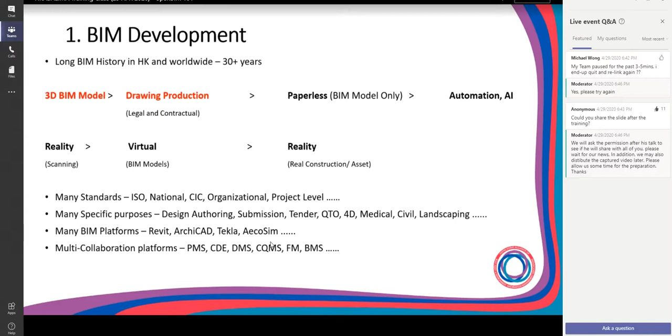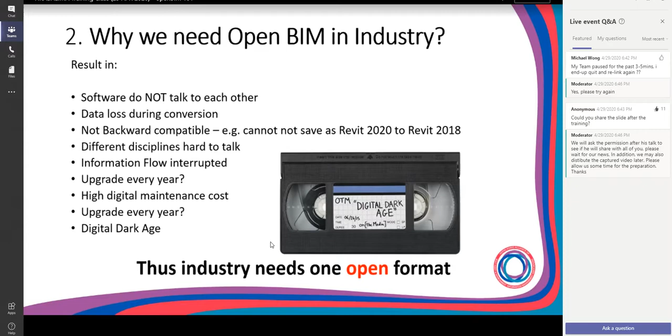So these are the points that I shared. Digital dark age. So it comes to the conclusion that the industry needs an open format. Now, when we talk about the open format, we will definitely come to an organization called buildingSMART. buildingSMART is an alliance of construction and facility management organizations. They try to standardize the process, workflow, and procedures for BIM.

Okay, now we all know BIM. But there are a lot of different forms, a lot of different information flows in the BIM process. So buildingSMART says we must have a standard to standardize all these workflows so that everybody is talking in the same language, right?

So buildingSMART facilitates key leaders with the use of these standards, enabling civil structure and building asset data in the life cycle process to integrate into the open BIM standard, improving the value, so that we can have a common language to share. Their vision is to have a sustainable building industry, in simple terms. Of course, on their web page they have a lot more of their vision to share with you, but since this is 101, I just picked some key points.

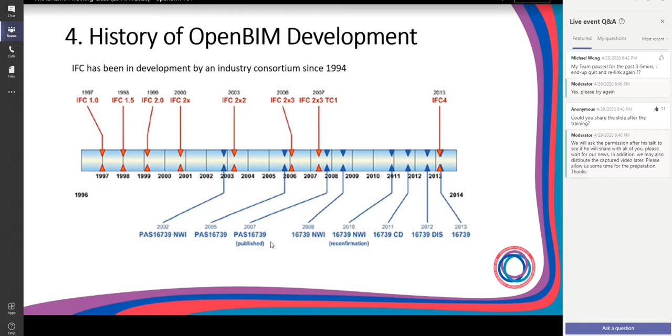So this is where we are on the openBIM development.

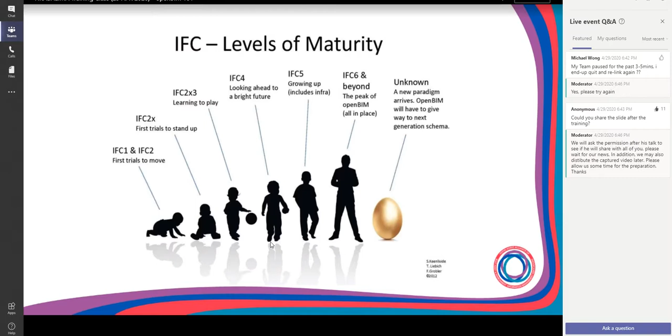So when we're talking about openBIM, we are not talking about a particular platform or software. It is a global effort where they try to share a common base, common knowledge.

Being a little bit academic, what is openBIM? Basically, it is a universal approach to collaborative design. The keyword here is collaboration—collaborative design, realization, and operation of buildings based on open standards and workflows.

So basically, it allows different project team members to participate in the BIM regardless of the software tools they use. Now, this is very interesting.

Now, I myself, by training, am an architect. I'm more concentrated on the design aspect. I may not be very familiar with what the FM people are using during the operation phase, but we are all stakeholders in the whole project life cycle. It is unfair to say that I have to learn every single piece of software, or that I can be expert in every single aspect. Nobody can do it.

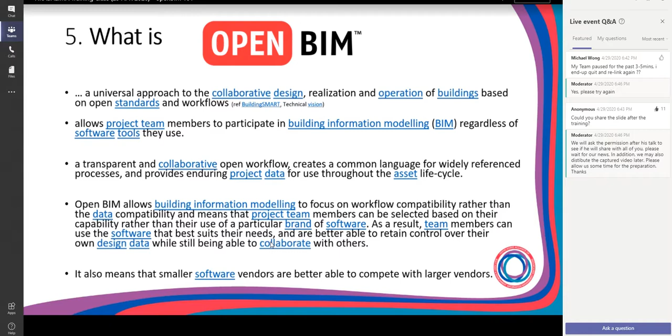However, the approach of openBIM is to open up—they're all open source—so that whatever you want to do, if you have the capability of programming or understanding how the software is put together, you may be able to change it and adapt it to serve you.

So on the keywords: the benefit of openBIM is a transparent, open workflow that allows all members to participate regardless of the software tools they use. You may be very good in Revit, Navisworks, or ArchiCAD—keep on using the software tools you're using. It doesn't require you to learn another new piece of tools for your task.

Secondly, common language—no matter which tools you use, as long as we have a common language, then we can talk to each other.

Number three, project data. Regardless of the tools that we're using, the most treasurable asset is the project data that we created during the whole life cycle. So in the design phase, we create the design data, and then it's passed on to the construction phase, which creates the construction data.

And later on it passes to the operation, and you have all this data for operation use. With all this operation experience, it forms the information requirement for the client to apply to the next project. So it's the project data that's the most treasurable. Now if you compare this project data with the digital dark age I just mentioned, it's the flow of this project data, non-brand, non-proprietary system, that regardless of the time, regardless of the media, we will still be able to get and extract all this project data for the project use.

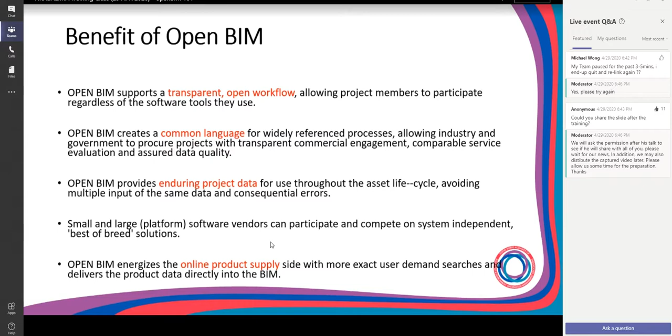Now we understand all these benefits, but what are the challenges? I put a few bullet points here. Well, since this is only the first time of the whole openBIM series, what that means is we are not very familiar with the concept of openBIM.

We may be very good at a certain particular software platform, we do not know other platforms. The government specifies a few platforms there, but it is not the whole of the BIM. So the local support here is still lacking. Hopefully after the whole series of BIM here, then we have a better understanding of how we position ourselves in using the BIM technology.

The next point here, which is very interesting, we have misaligned interpretation towards BIM. So towards the same object, for example a wall, the way architects see a wall, what a wall is, can be totally different from how an engineer sees a wall. Same object, different interpretations, of how the BIM model should go. So the architect may build their column from bottom to top, whereas the engineer may build it from a level by level point of view.

Same for the slab. Now this different interpretation of the BIM model will lead to different quality or different purpose of a BIM model. So without an understanding of all this, the model sometimes may not be able to be beneficial for all the stakeholders.

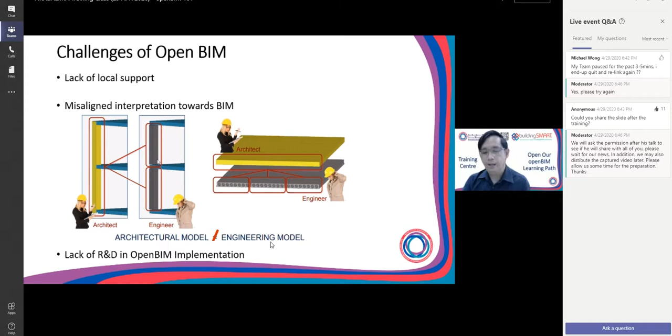Point number three here, when we talk about openBIM, it is not depending on a particular brand, so which software we are working on. That means there will be a chance for us to actually grab the open source file, then we have to write our own program. Maybe in that case we are talking about the convergence of the building professional and the IT professional coming together.

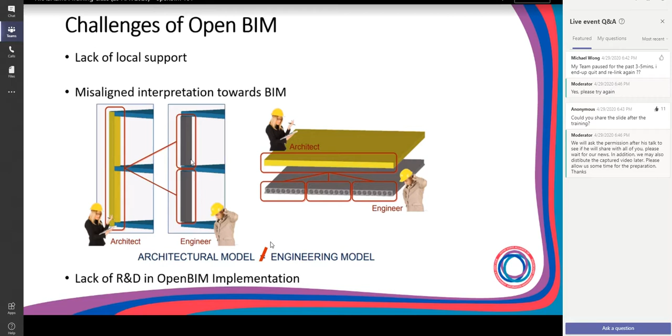So how can the IT professional know about the need of our building professionals? In that case, there will be an R&D requirement. However, this demand has not been fully experienced in the Hong Kong market at the moment. How many R&D, how many funding, how many companies are doing this R&D program writing for the building industry? Not much.

All right, now when we're going into a deeper understanding of the openBIM concept, just before that, let me clarify some of the misconceptions. Now I just mentioned about the different formats that we'll get in touch with in terms of software. Somebody knows about Revit, somebody knows about ArchiCAD, but openBIM is not about conversion.

It is a false expectation to think, okay, can I convert a Revit file into an ArchiCAD format so I can open it in ArchiCAD, or can I convert a Tekla file into an ArchiCAD file so I can use it there? The concept of conversion is not the real understanding of what openBIM is. When we talk about the common sense here, we are not talking about how to convert a file from one format to another. Please be clear, we are not talking about conversion here.

Now for the rest of the presentation, this is the formula. openBIM consists of three things. One is a model, a 3D BIM model, in IFC format. That's not enough, we have the BIM model, but that's not enough. We must also have a common language.

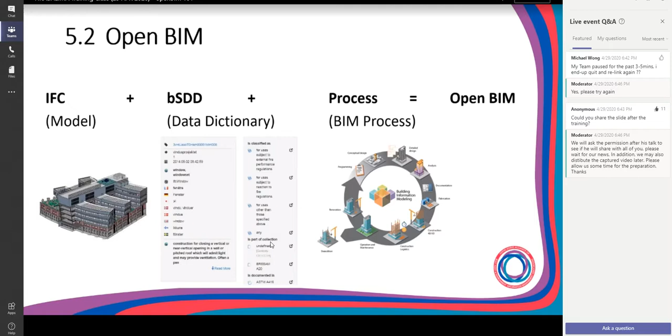Just remember this formula here. For the rest of the slides, everything refers to this formula - whether it's the BIM model, the data dictionary, or the process. And then we'll come up with more jargon.

Now, if we want to put the three things together - when we talk about IFC, the blue circle, there's ISO standard 16739, talking about how digital data should be structured for whatever requirement. Some of us may know about ISO standard 19650, which is getting more popular now. But when we talk about BIM, it's not just one standard, 19650 - there are more standards, and more are coming.

On the process, the yellow circle here, we are talking about the BIM process - how the information is delivered. There's another ISO standard, 29481, covering the methodology and format for how it should be delivered. And in terms of the technology side, the data dictionary, there's the framework for object-oriented information, ISO 12006.

Again, all these ISO standards are not familiar to us. However, when we talk about openBIM, we must be talking about a common language, and it's all these standards that take prevalence. Out of that, there's a red circle, a jargon called MVD, model view definition - taking information and extracting it to serve a certain purpose. I'll come to that MVD later on.

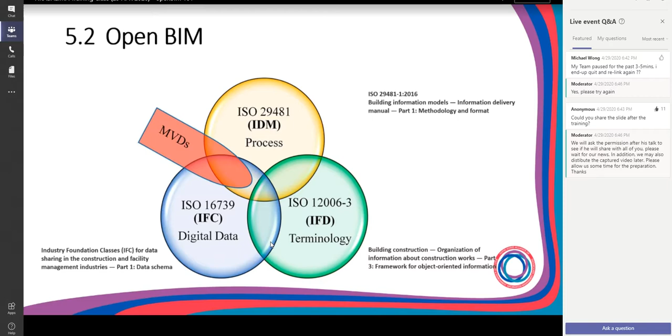You can see the relationship of all these three things joining together, and we have new definitions. The easiest one to understand is the third one, the BIM process, because we've been practicing that for the last 15 years in Hong Kong. So everybody understands the BIM process.

So we have the requirement from the client - they need to have a database throughout the whole project life cycle. Then the design consultants respond to the client's need to use BIM for design, and they need to get objects from the project library. Then they use design authoring tools to come up with the column, beam, window, things like that. We have the structural column, beam, and we have the MEP - the ducts and pipes. We know all this.

All right, we know all this. And we also know input information: the dimension, the material, the U value, the loading, and the flow rate. Okay, these kinds of information we need to input in the BIM. When you say BIM, this is the I side, the information side.

All right, now we mentioned the drawing production. From the BIM, we have the drawing production, whether it's the legal GBP submission, the structure submission, the tender drawings, or the shop drawings. These are drawing production. Again, we know about this. And then we also know about the coordinated disciplines. We have clash detection, reporting, the QTO, the cost and the environment. Again, we know this. We are practicing this already.

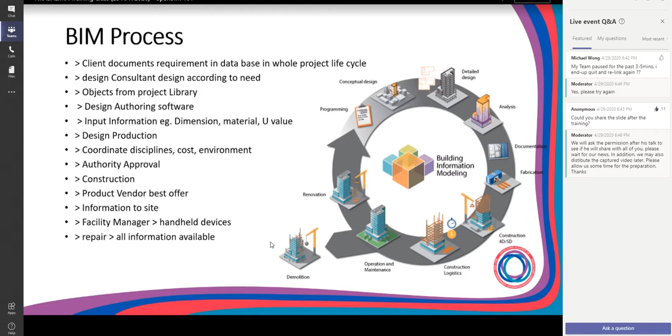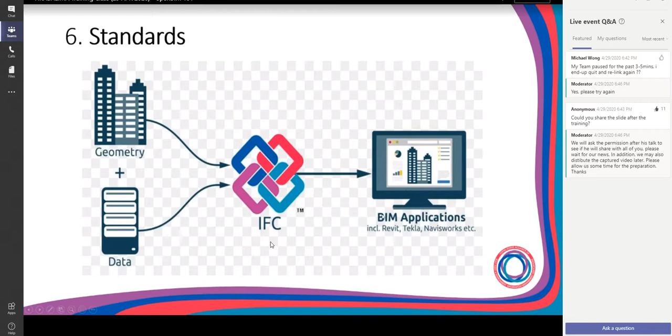Now, if you remember the formula, the first one, IFC. Now we talk about standards. IFC is all about standards. We have the geometry part, we have the data part. When they talk in the IFC format, they standardize them so that we can further develop the BIM applications, be it Revit, Tekla, Navisworks. We are familiar with all these BIM applications. However, we are not familiar with the front part, the IFC part.

When we say IFC, I'll just mention those names, those jargons. IFC 1.0, 1.5, 2x3, 4, and 5. These are the historical development. So all this building information is shared in one open format, with the different versions, 2x3, 4, and 5.

If you look at the applications, IFC is now being specialized into IFC4 precast, IFC for site, for landscaping, for urban planning, IFC for airport, IFC for road, IFC for bridge. These are developments from the IFC standard. It's not only a common standard, but also beginning to specialize in certain areas. All this jargon you will start to touch on when you really look into the IFC standard.

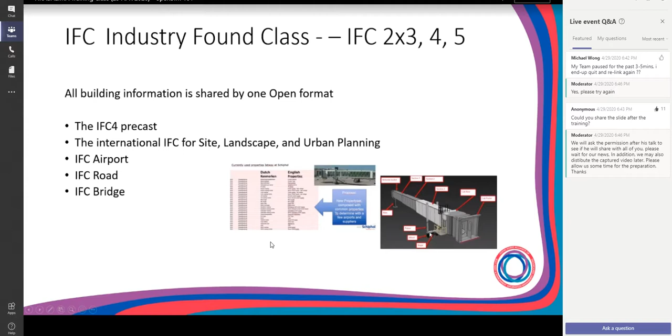More jargons, right? When we talk about openBIM, it is a digital way to enable different stakeholders to work together, regardless of the platform they're using. You can see the two gentlemen here. The one on the left-hand side is using BIM application I; he may be an architect or engineer. The gentleman on the right-hand side is using another BIM application, J; he can be a property owner or a contractor. We assume that I and J are two different platforms.

Think about the real situation we are having at the moment. It is a fact that a certain brand of software is dominating the whole market. When the design phase, the construction phase, and the FM phase are all using the same platform, the same BIM application, there aren't compatibility issues, apart from backward compatibility. So the data generated from the design phase can be used in construction and for operation.

Imagine all of a sudden you have an architect using a certain brand and the contractor using another brand. How can they communicate? How can they talk to each other? Do you need to regenerate everything again? So try to look at it from this perspective. It came up with five basics for sharing our thoughts. More jargons, right?

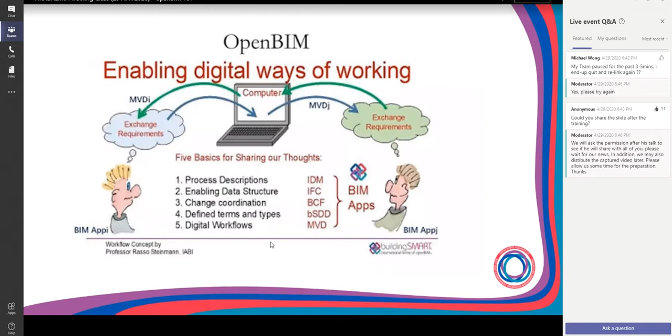Now, I'll try to have an overview for each one of these. I know it's a lot of jargon. It's kind of boring, right? But we have to understand all these basics first.

Okay, IDM, Information Delivery Manual. The definition of IDM is a methodology to capture and specify the process and information flow. We are talking about the process. What process? We talk about the client, the design, the construction process, and the information flow through the whole thing. So for this information delivery manual, we can draw an analogy; look at the example below.

The analogy is that IFC, Industry Foundation Classes, is like establishing a language, English or Chinese or French or German. It's a whole system of language. So that's IFC. But when we want to do a building for a certain purpose, like a statutory submission, you are not concerned with the construction language. For statutory submission, I'm concerned more about submission.

I'm concerned more about areas, more about the functional use. How to construct it may not be my immediate concern. So from the whole language, IFC, you select a particular word or syntax that is relevant for a certain purpose, and that is the MVD, the model view definition. You do not need to know every word in the whole language. You only need to know these few words for statutory submission, for example.

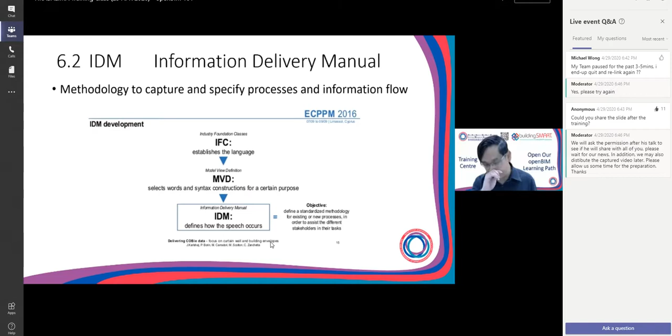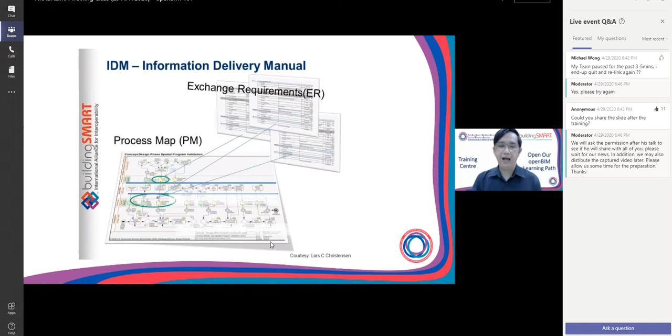So the objective of IDM is to define a standardized methodology for existing or new processes, in order to assist all the different stakeholders in the task: what to deliver. Now, this slide makes it a little bit easier. At the end of the day, how are we going to use this information? How do you need to exchange this information?

Now, we know these terms, exchange requirements, exchange information requirements. In terms of a lot of tables: what format you're going to give me, how can I read and use all these comments, what sort of information you will be giving to me. So exchange of information. So that is the IDM, information delivery manual.

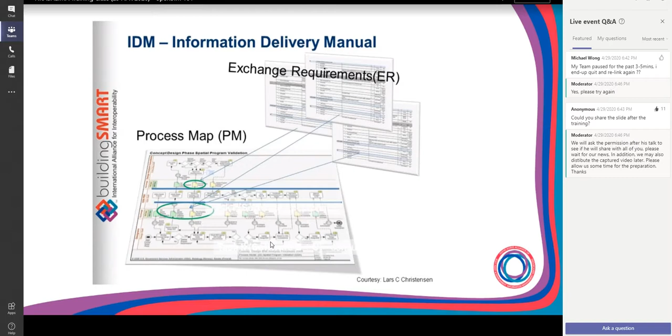Next jargon, BCF. BCF stands for BIM Collaboration Format. We all know that we need to go through designs. In design, there will be different ideas, trials, test cases. We talk about collaboration: you need to talk to the structural engineer, the building services engineer. In the construction phase, we need to talk to a lot of other people: the power company, the subcontractor, the manufacturer.

A lot of these collaboration activities are happening. So how can we gather all this information to express ourselves and talk to others? What tools are we using? Red pens on the plan. We mark up, write down our comments, scan the sheets, and pass them to another party. That party may print it out, look at the red markup, and change the design to cater to all these requirements.

Now, we are using red pens, paper, and clouds. This is what we are using at the moment. Now, openBIM thinks this is not efficient. Who has made this comment?

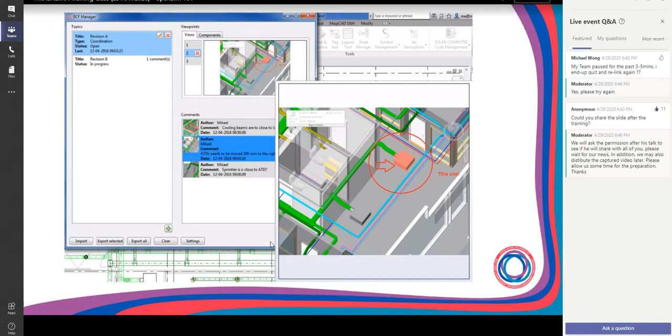So there will be 100 or 1,000 similar cases everywhere in the project. Exactly this comment here, where was it made? Okay, so by means of this BCF format, it is not associated with a particular software or platform. So every software can actually read it and you jump back to this location. Now that is the openBIM concept for collaboration, the BCF format.

Okay, so it can centralize all this coordination and communication, it tracks the issues, who has made a certain comment on a certain date, who is going to respond to it. So we have the 3D viewer to see it in its original context. And it can access the information anywhere, anytime using a browser or different format. It can manage the access rights, who can see a certain format, who cannot.

All right, and also, apart from the cloud or the comment that we made, sometimes you will want to attach a video, an image, a JPEG, or a crop, a snapshot of your approved drawing. Okay, so it has the ability to attach your file to support the discussion.

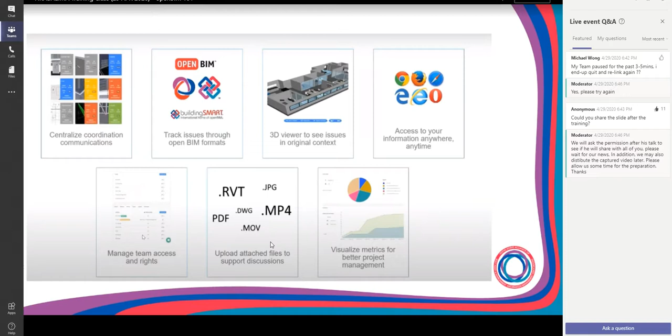And lastly, they may have dashboards to outline the performance, the KPI of certain parties, how many comments someone has made, what is the response time towards those comments, and how many comments have been entertained out of the totality of the comments. Now, all this can be performed as a result of using a BCF format.

Now, coming to the difficult part, the model view definition, right? MVD. Because we want to have a specific use, GBP, for example. I just mentioned GBP, the General Building Plan submission. So the task is very, very definite. So the GBP submission needs what? We need to have the functional use. We need to have the area. Functional use and area, for example.

Out of all of this information in the BIM model, how can we find the functional use and also the area, picking from the whole database, and then we can further develop on this functional use and area, so that we can devise an automated system to help us do an automated GBP submission, for example. I'll show you a case later on.

Okay, COBie here, for example, we would like to have the product information, the location information, to serve the operation phase. We do not need every single piece of information that the BIM model contains. So it's a very, very particular data requirement. So we have this term called the MVD, model view definition, coming out from the whole IFC structure.

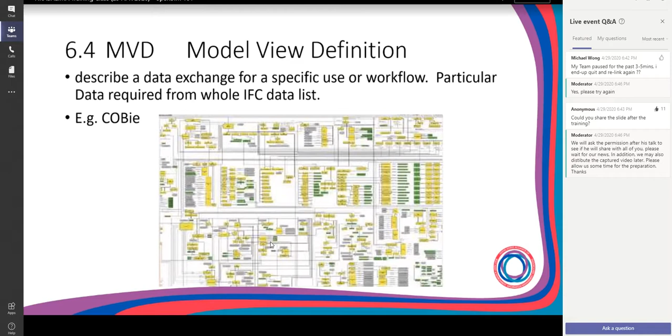Now it comes to another session here on the standard libraries. We have all the standards. Of course, we have a lot of objects, all right? A door, as you mentioned, will be used in project 1, project 2, project 3. Every single project will have doors. But a door can be supplied by manufacturer A, manufacturer B, manufacturer C. They have the product information.

So in terms of resources, if we can have a resource library which contains a standardized object and product database, if everybody in the industry follows the same standard, that means regardless of whether you are manufacturer A or B or C, all the naming in the database is the same. All the properties are the same. I use the door width as an example, right? So every manufacturer calls it door width, not width of door.

So they are having the same language, right? So that all these entities, the properties, classifications, they're all the same. They can all share the same library of objects and attributes. So now all the software understands the terminology. Now this is the bSDD part, okay, the data dictionary part.

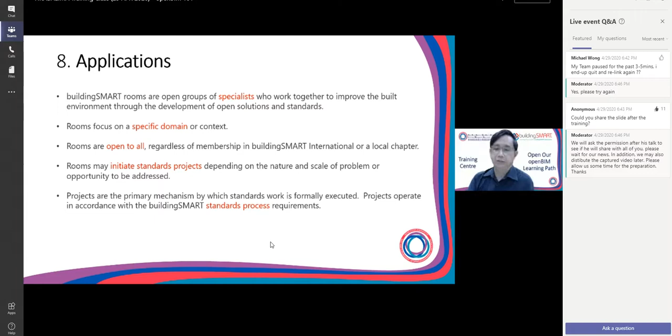But there's a room about railway. Railway is the youngest one, and there are some unborn rooms. Last year they were talking about a power station room. It hasn't officially been born yet, but this is the direction. So with different objectives, they can initiate standard projects so that they can understand the nature and the scale of the problems they try to address. And lastly is the standard process requirement. With all these applications, all this jargon, all these definitions, how can the process be standardized so that we can work in a very efficient way?

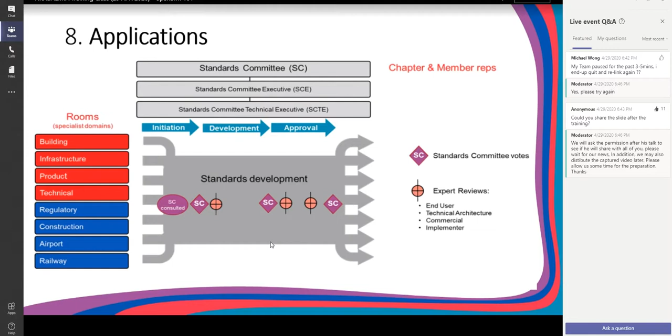Now, when I say buildingSMART, I'm referring to buildingSMART International. It is an organization composed of many local chapters from all over the world. I'm sure Ada will be very pleased to tell you that we got the Hong Kong chapter last year, right? We were accepted by buildingSMART International and established our Hong Kong chapter. That's why we are sitting here having this series of openBIM seminars. We are the Hong Kong chapter. All right. I just mentioned these 8 rooms at the moment, but there are 9th and 10th rooms that keep on coming.

Okay, now I just pick up a few examples to let you get some feel about these different rooms, what they are doing. Now you see that this technical room is really technical. They're talking about programming, how to write a certain program. How to call the IFC building element component and element type. You must fulfill a certain syntax before the program can work.

Okay, I do not understand all these, right? So this is really technical. I actually sat in that room for the whole session. I couldn't understand a thing, unfortunately. But that's needed because we are talking about open standard. Standards are just a framework. How can we make use of the framework to help ourselves? I'll show you in several examples later on.

Now, this product room, for example, is talking about products, right? So we know about 5D BIM. We're talking about the quantity take-off; the QTO is to facilitate the QS. But what about the manufacturer? Now we know the quantity of a certain object from the BIM model. How can that information be utilized by a manufacturer? How can they facilitate the quotation of those objects?

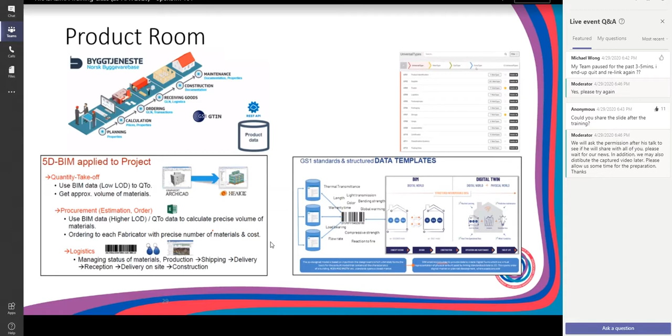IFC comes in different versions, and the source file comes from different software. When they export into IFC format, are the names and property sets conforming to the IFC standard? If they do, they give the certification. If they don't, they need to improve until they comply. On the other hand, a software can have an importing function. When they import from the IFC file, can all these IFC properties be input into that software? So buildingSMART does software certification only on importing and exporting to a certain version.

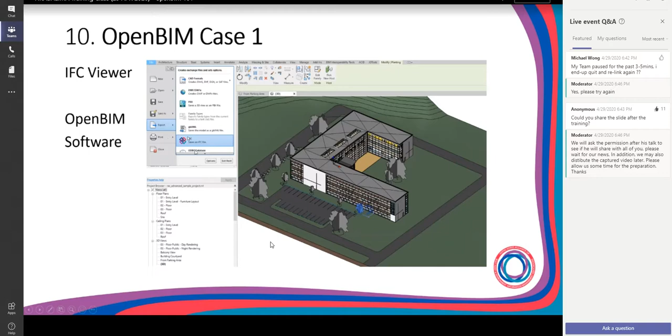Now on the screen here I have a Revit version, and I can export it to an IFC format. As I mentioned on the previous slide, Revit has been certified to be IFC compliant. I'll show you.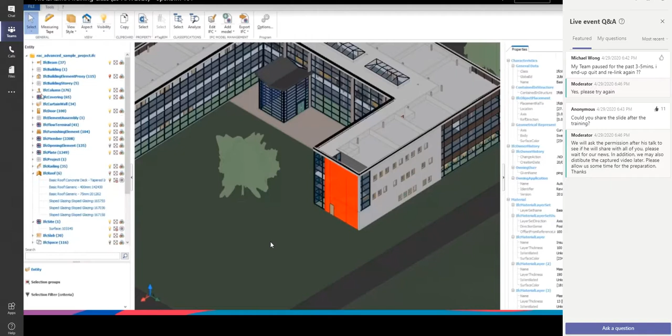Now this video here is only a viewer. The model here is not the original Revit model. You can see the trees, the elements, and the blue information here. There may be columns, walls, windows. It looks familiar, but it is not exactly the same as the Revit, right?

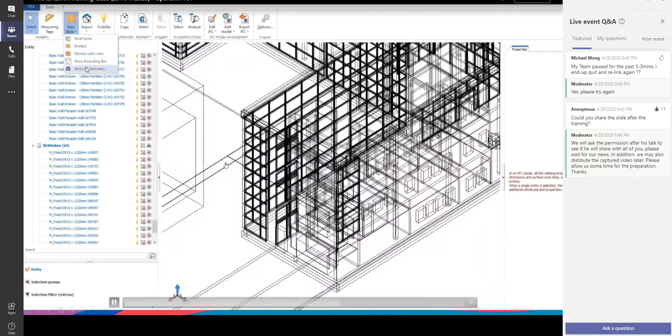You can see they have this IFC terminology. Now to the right-hand side, you can see the object consists of information - the characteristic, the data, the parameter placement, geometry. All these are the standardized IFC information coming from your model.

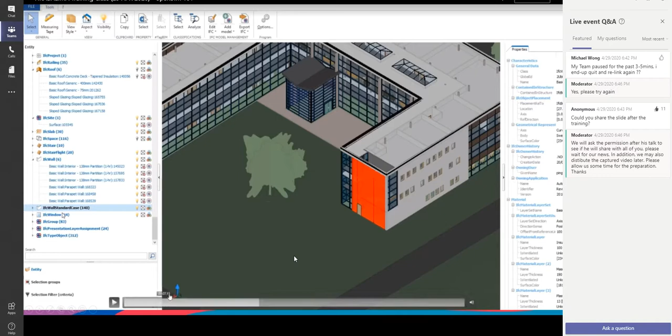So the original Revit model is no longer the same. Now because all these names, as I said, this is the BSDD - the terminology, the language. Since all these languages are standardized, they're no longer closed. That means programmers can actually take all this terminology and write into their own program to solve a certain problem.

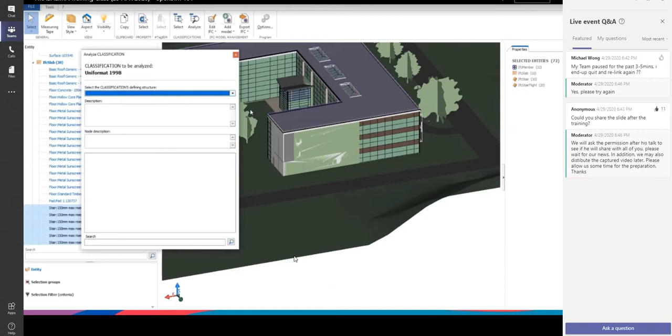Now you can download this viewer free from the internet. I just downloaded it. You can turn into outline, turn into different color, hide certain things, view certain things. These are the capabilities for this open source viewer. You can do whatever you want. So in terms of capability, we are no longer in a closed Revit environment, but exposing ourselves to this major capability now.

Okay, now case 2. I have 3 cases to show you very quickly. The title here is called statutory approval. I don't know whether you know the existing situation in Hong Kong here. Being an architect myself, we have a design, we need the government to have it approved. In Hong Kong, for the first time we got a general building plan approved, it takes 60 days. Can it be faster? Well, yes or no. But however, our practice, it costs us 60 days to get it approved.

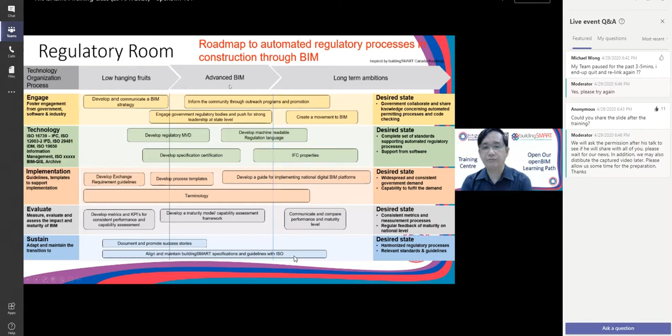So they come up with all these small tasks, listed out here: develop and communicate a BIM strategy, engage the government and whatever. Then with all this MVD, they try to establish a system. Now when I say come up with a system, that is a very technical term - that means it involves the software writing, the programming, right? So you can see this with all these concepts from concept design, construction, with all these e-signature - this is a building approval process.

We have the master plan submission process, approval process. We have the GBP approval process. We also have the construction approval process. Now with all these, this is a real pilot case - it happened in Italy. So they established the e-submission form, the initiation of BIM to paperless process, and established a guideline, steps, mandatory e-submission.

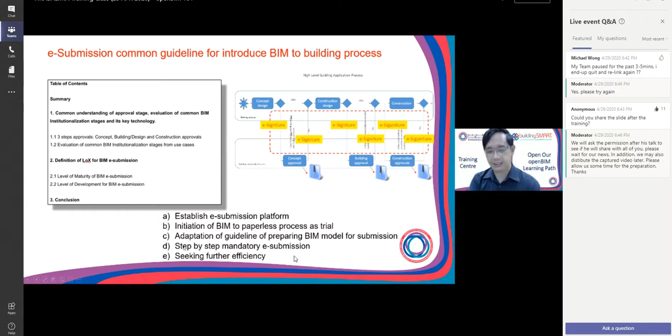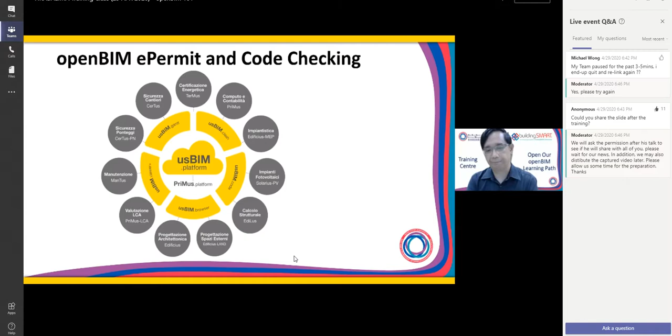Now because of time, I'm quickly showing you all these slides. Please be reminded it's already 7. Okay, I'll do a very quick - now, without going into very much details in here, I'm showing you the product, right?

This is a web page that designers can actually log in and submit their BIM model.

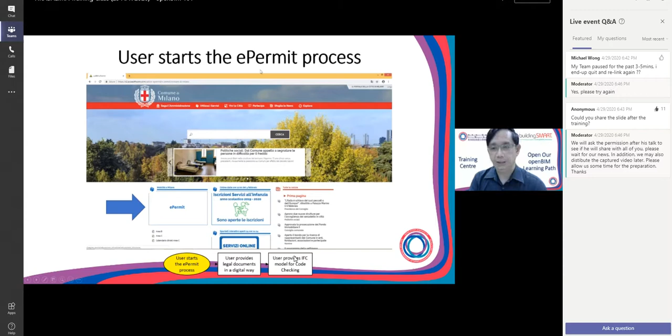Okay, select the project. It is in Italian, all right?

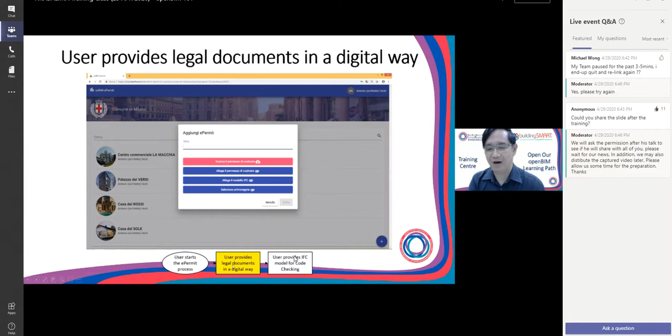So the users provide the legal document in a digital way, to fill in the forms - these are PDF forms. The system automatically extracts the information from the PDF. Now submit the model.

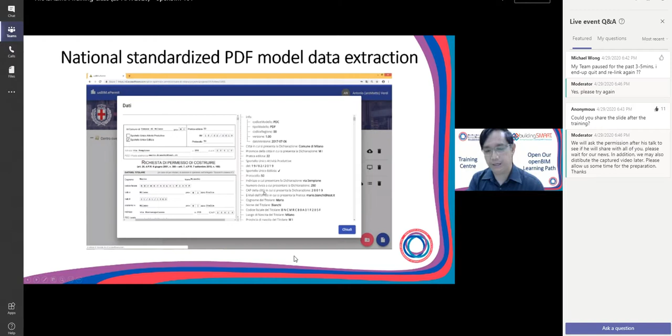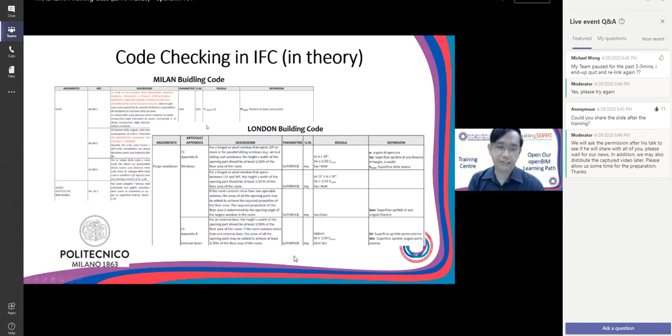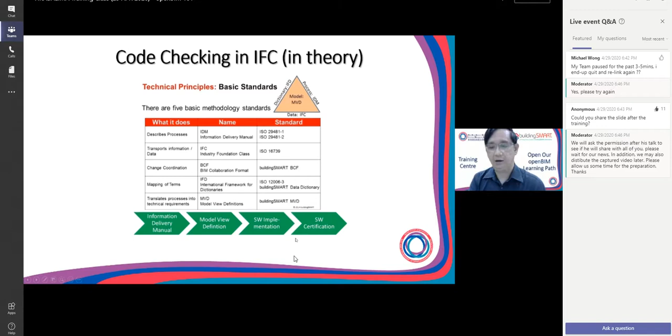Okay, the building code - now they try to compare different country building codes. They find out, of course, they're different everywhere, but the principles are pretty much the same. You can see these terms: IDM, MVD. With all these steps set up...

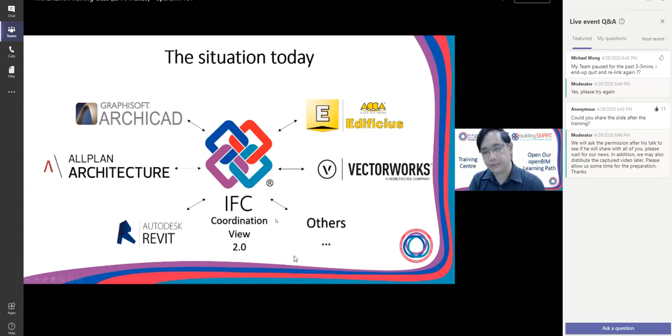they use the IFC submission. It doesn't matter what the designer is using. So they confirm the IFC, but direct use of IFC is not good enough to fulfill the approval process. So they have some tools, the BIM tools, to modify the IFC, and they form a new IFC.

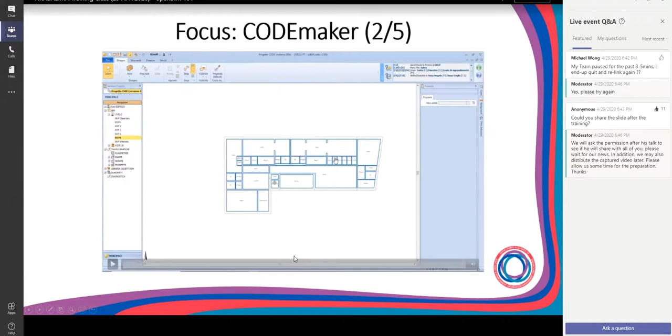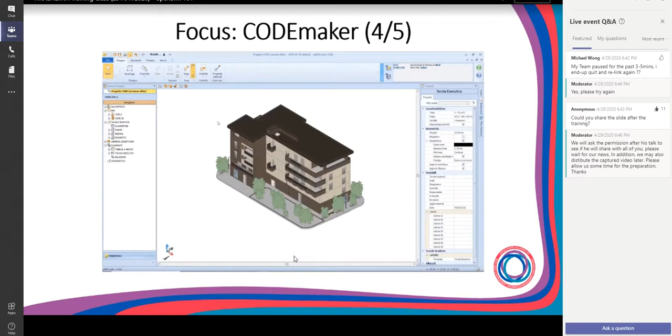Now in here, all these plans are generated by the system. There isn't a mature product in the market that specifically does this submission. You can see these production drawings - it's not done by the designer, it's done by the system. What system? The IFC system. They have programmers that make use of the information to actually produce all these drawings.

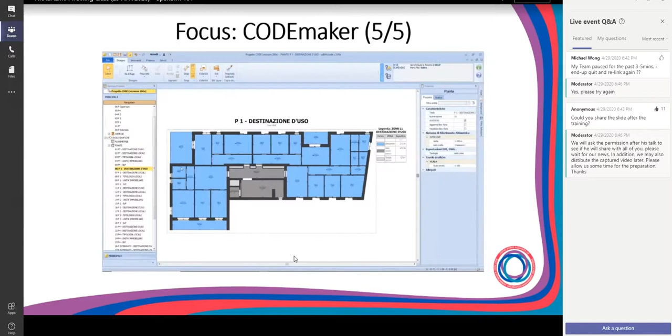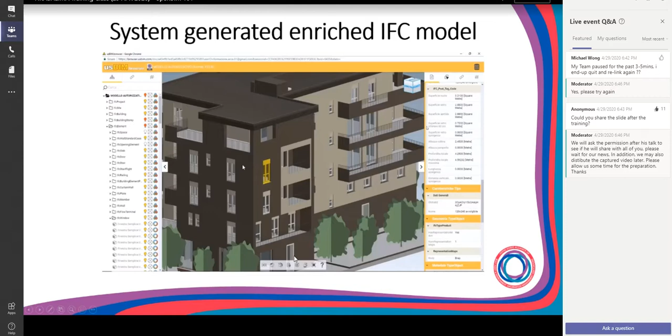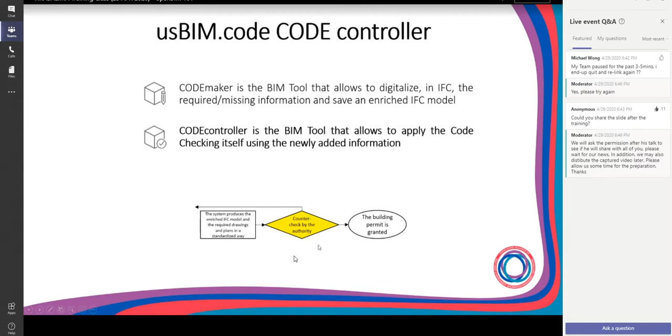Now this is from the submission side. Very quickly, that's from the government side. They log in, look at the PDF, look at the model - this is the model viewer. Look at the automatically generated plan, automatically generated area. Double check on the laws and regulations, the rules.

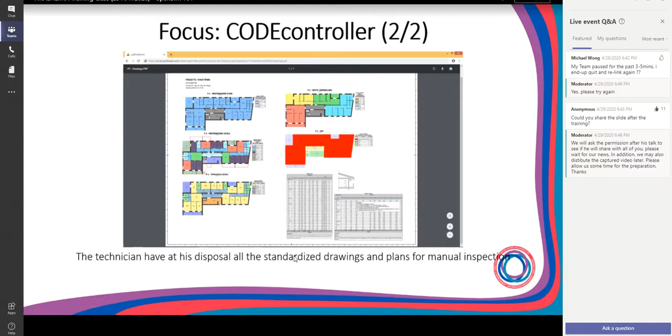Produce all these drawings - these drawings differ for every project, but the system is the same. Now, at the end of the day, they draw out this information, the area, the meter square. So everything is streamlined at the end of the day, so that project can be built.

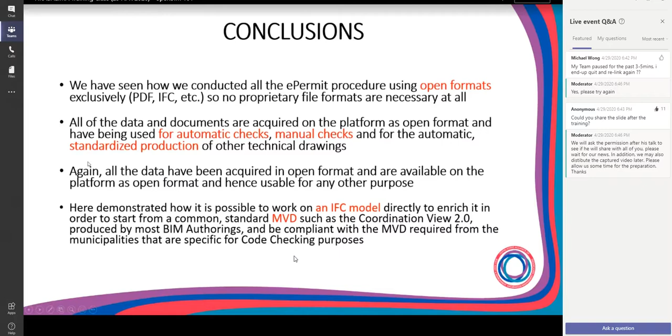So the topic for this presentation here is building approval in one second. The whole process is just one second, versus we have 60 days in Hong Kong. So basically using open format to facilitate automatic check, manual check, standard drawing production, IFC model for viewing.

Now this is an Italy sample - it has never happened in Hong Kong, not yet. All right, very quickly, case 3.

Case 3, this is my last case here - it's talking about Italy, the railway project. Now for railways, there wasn't any particular software that helps the industry design railways. So we use, for example, Revit or ArchiCAD or whatever - a building software to build a railway. So it has some sort of limitations.

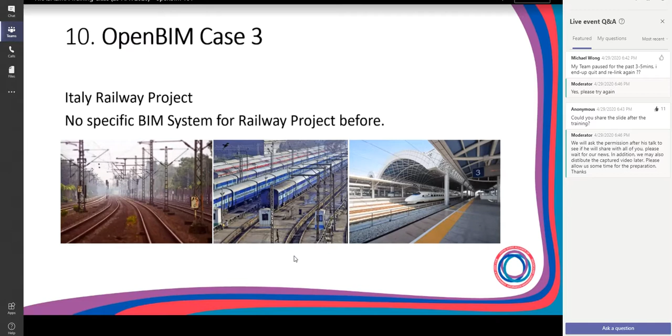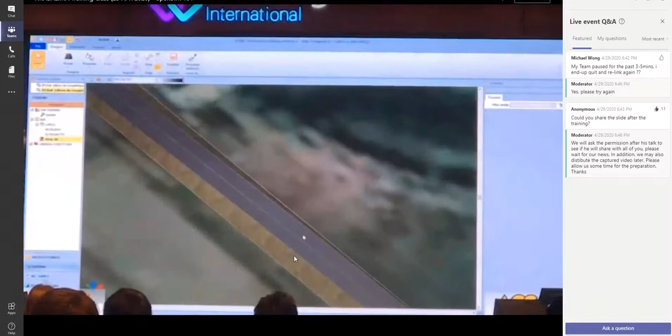What I'm going to show you here in 3 minutes - this is a video presented at buildingSMART International. Look at the interface here. They are using programmers to devise a new piece of software to resolve the issue of designing railways. Railways have their own specialties - the ballast, the sleeper, and all these different elements.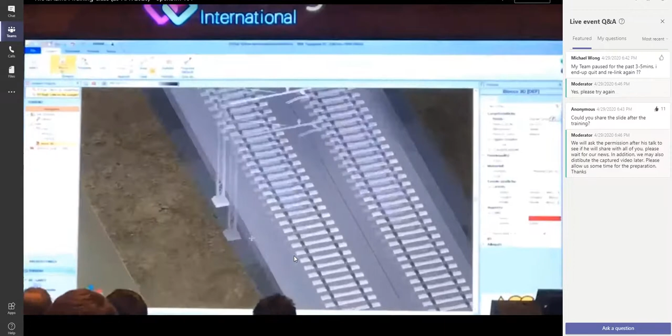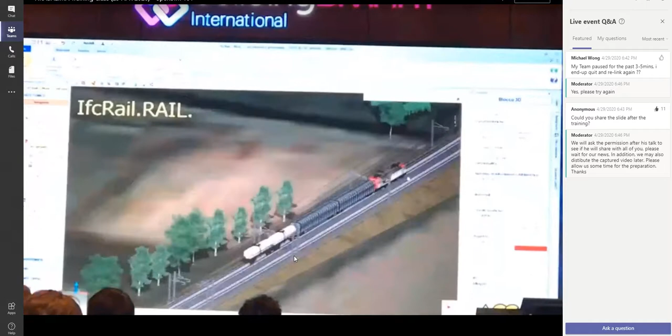All these variations - instead of using a generalized BIM software, this is a specified BIM software that has been developed under the IFC requirement. So with just a few hours you can see the result - the railway is there, the wire, even the train.

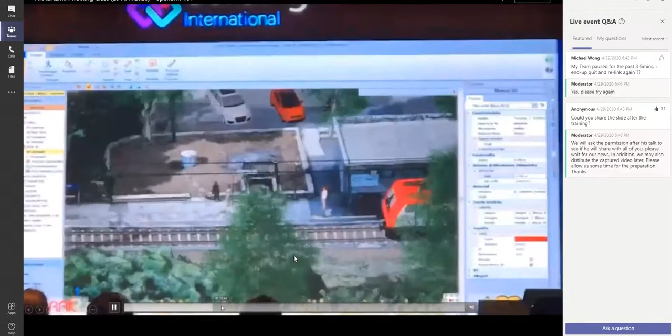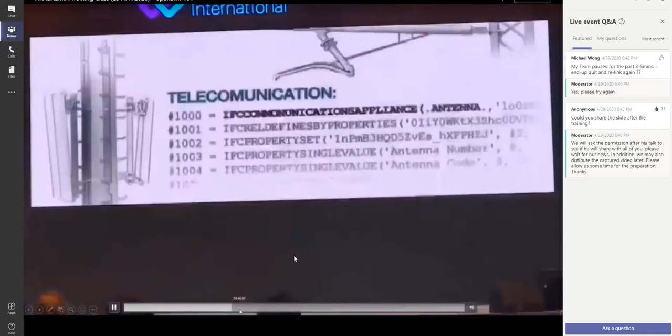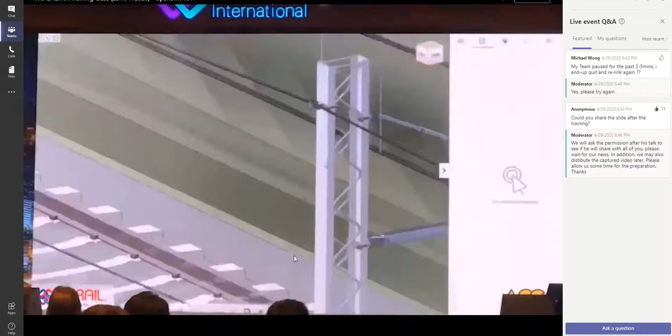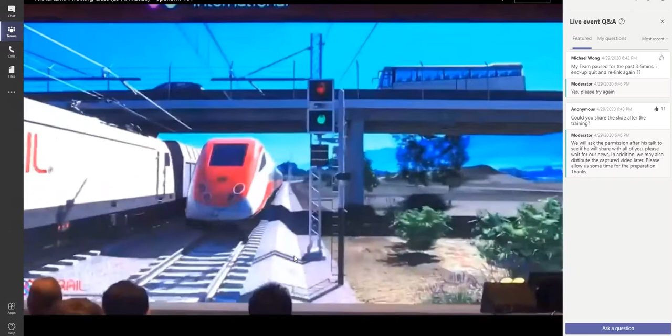Okay, sorry, just press - okay, now with all this information, because they are using the same database, the same terminology, right? Rendering - so this is not a Max render or whatever, it's their own development, the railway rendering engine.

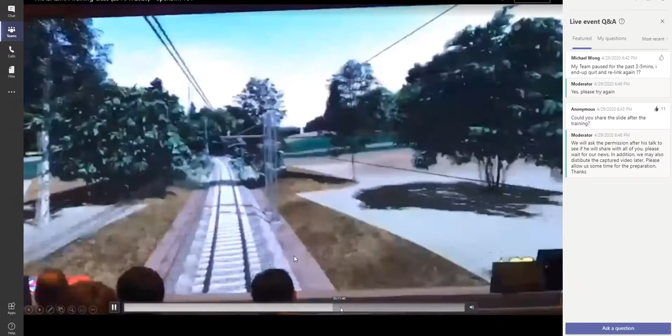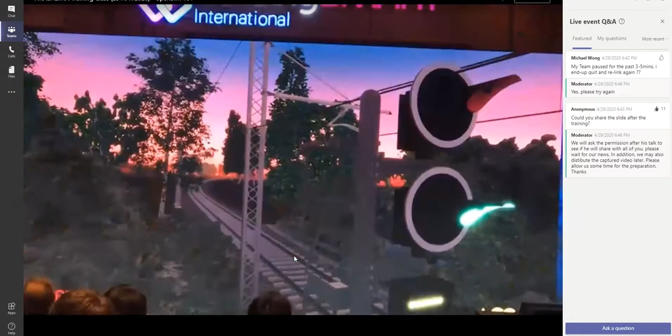VR, training the drivers, the train drivers - the real-time rendering. Now you can see that all these applications, it now becomes a tool that can help the railway professional do their job - the design job, the presentation job, the procurement job, the training job. Now you can imagine there wasn't a software like this before, but by means of IFC, this particular railway software facilitates the whole process.

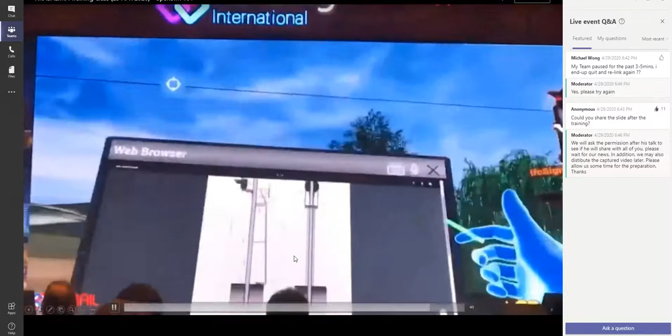Because of time, I'm not going to play every single second, just the VR. Now, in short - let me just close the presentation. All right, so basically what I just presented today is the fundamentals, okay? You look at the technical terms, a lot of jargon, a lot of programming techniques that we do not know.

But if you compare what we know about BIM in the past 10 or 15 years, now the openBIM concept opened us to another horizon where we try to collaborate among different stakeholders.

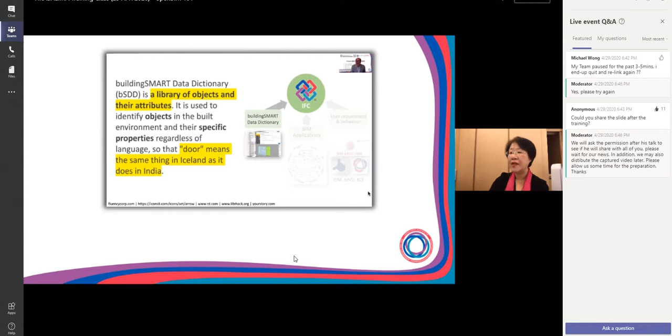We realized that more than half, or 70%, of those attending this seminar have not attended our first lecture. So I will quickly take you through our organization.

The Alliance is founded by 3 associations, namely HKGISA, HKIC BIM, and HKI BIM, and these are specialists in information management for built asset and environment industries in Hong Kong. The term built asset includes all types of man-made assets in the built environment. The term environment includes man-made environment and natural environment on planet Earth. In short, we embrace everything on Earth. The board of directors comprises 7 members coming from these 3 founding members.

We uphold the vision of buildingSMART to enable full benefits from digital ways of working for the built assets industry. We uphold our vision of the Alliance to foster societal collaboration for smarter information management across built asset and environment. And our missions comprise 3 levels, as shown here.

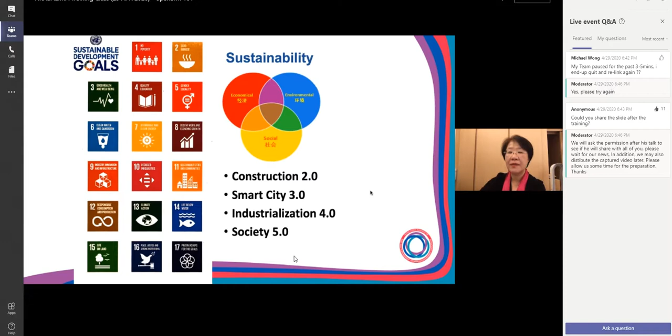And we ought to have launched a program of activities had it not been for coronavirus, so we have to go to a virtual platform for training. The training program begins today, you can say, or started with the opening of our center on 16th April, and this is our first lecture. So we start from BIM to openBIM, from informal to formal. And Mr. Felix Chan is chairman of our training center, who is the mastermind of all these programs.

We said, 千里之行始於足下. The journey of 1,000 miles starts with a very small step. And today, perhaps this openBIM 101 is a small step, but it is a very important step in our journey.

So you may ask, what's coming up next? Well, we have a series of 4 lectures coming up. First is Davis, openBIM 101 today. The second is the global trend of openBIM development, global and local openBIM cases sharing by Mr. Tony Leung. The third is Dr. Jack Chang's lecture on openBIM over full life cycle. And the fourth one is Mr. Kevin Wong's Mastering Knowledge and Tools for openBIM.

So let's work together. You can join us if you're corporations, societies, or education institutions. And join us if you believe in openBIM, innovation for better built asset and environment, and integrating BIM, GIS, and other information management systems. Thank you.